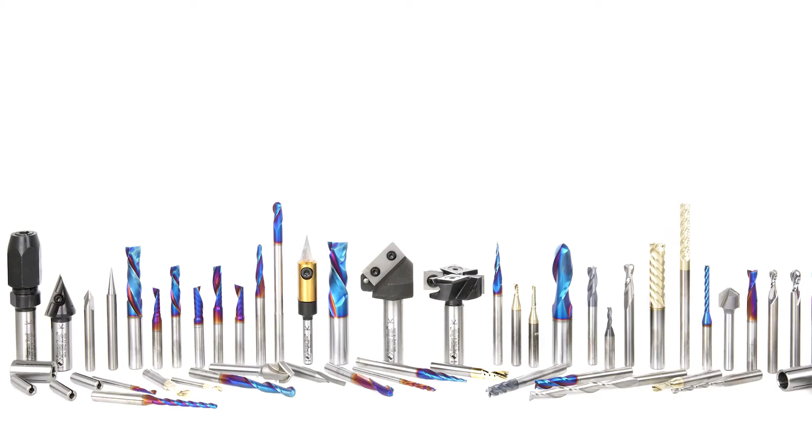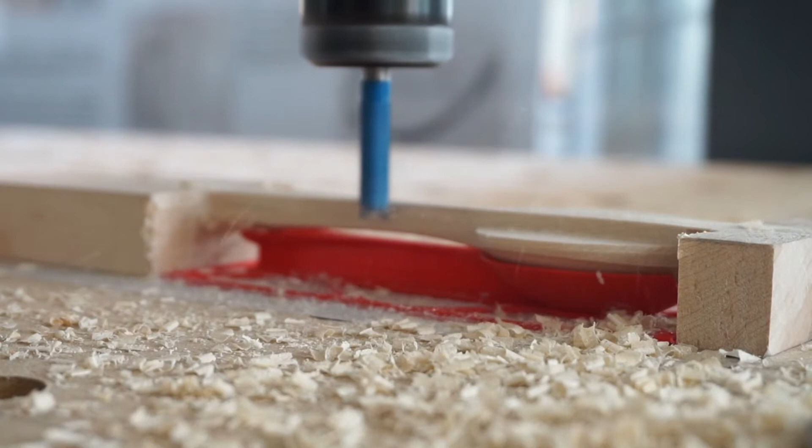The first thing to know when choosing your cutter is what type of cutter it is. There are three main different types, and they differ in the way they remove cut material from the cutting tool. When cutting material, you generally want your cutter spinning at a speed that creates chips rather than dust, as this provides a better surface finish.

When the cutting face interacts with the material, it needs to move the chip out of its path so it can continue unimpeded. The way the cutter is profiled will define how the chips are removed.

Traditional router bits are known as straight cut bits, as their cutting faces are aligned parallel to the cutting axis. They are basic in design and relatively low cost compared to some other designs on the market. Straight cut bits are useful for cutting through solid material which is not fully enclosed, so the chips and dust fall away from the cutting tool, as there is no route to encourage them away from the cutting face.

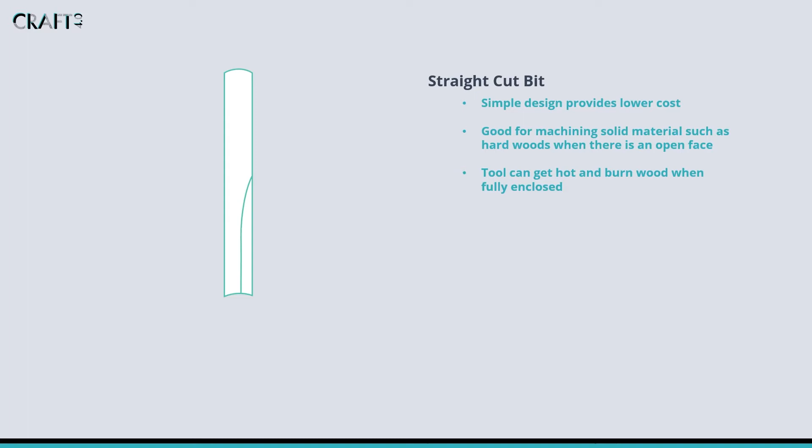An upcut bit is similar in design to a twist drill that most craftspeople are familiar with when boring holes. The upcut bit is profiled so that as the cutting tool rotates, the chips are pulled up and away from the surface of the material.

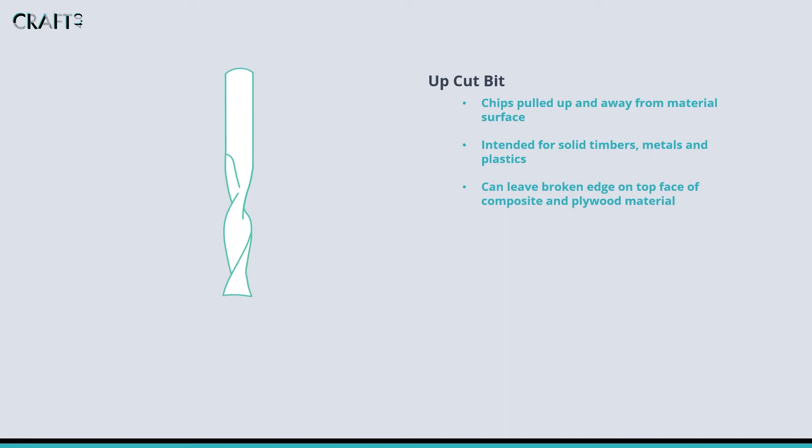They are the most common bits found, and are intended for solid materials and hardwood more so than composites and plywood boards. Upcut bits tend to rip through the material when cutting and can leave a jagged, unseemly edge on the visible face. However, because they remove chips efficiently from the cutting edge, they tend to move through material faster and at a much higher RPM, meaning a job can be completed much quicker.

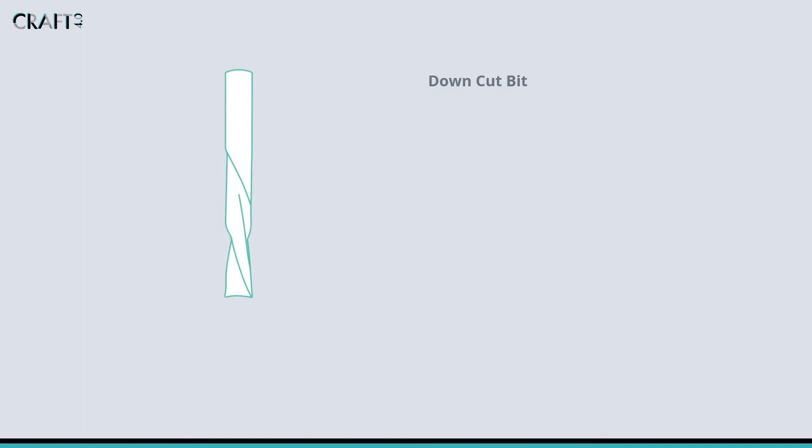Downcut bits are, as the name suggests, designed to work in the opposite way to an upcut bit. Rather than pulling chips up and out of the path of the cutter, they push them down, which can lead to the chips being cut multiple times.

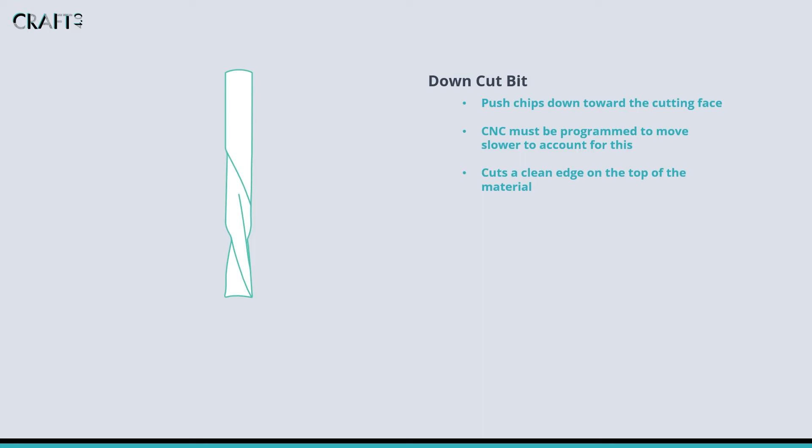For this reason, you must program the CNC to rotate slower and progress through the material at a reduced rate. Downcut bits are, however, the favoured choice for cutting through thin material, such as thin plastic sheets and wood veneers. They are also good at preserving the top face of the material, so if you're working on a piece that requires a clean cut on the upward face, this is the type of cutter to use.

Compression bits utilise both upcut and downcut profiles in their flute design to provide a combination tool that can be used at higher speed through thicker material, like the upcut bit, but without the potential damage to the top face found on the upcut bit.

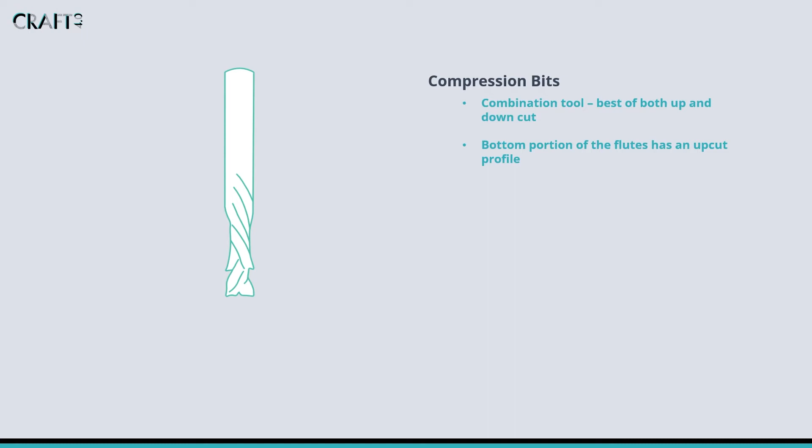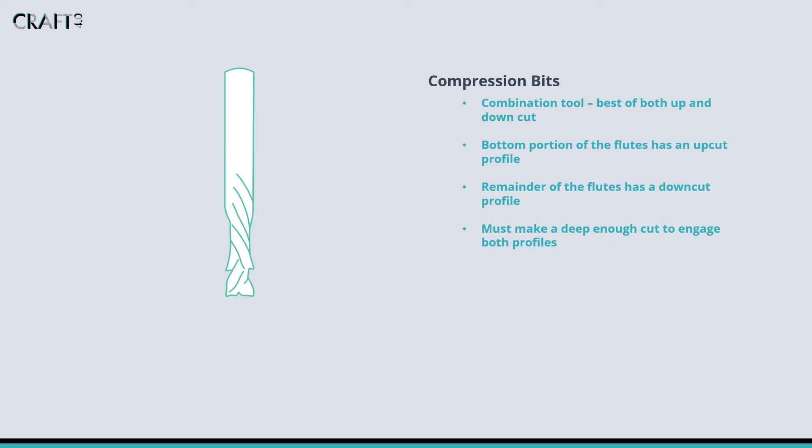They're particularly useful when cutting through plywood materials, which are susceptible to splintering on either the top or bottom face when cutting through the full thickness of the material. To gain full benefit from the two different profiles, the compression bit must engage enough of the tool to utilise both the upcut and downcut of the profile.

Cutting tools are made up of several sections that allow them to be used correctly. To properly plan and program your CNC, you will need to understand the different sections of the cutting tool and how they relate to programming the machine.

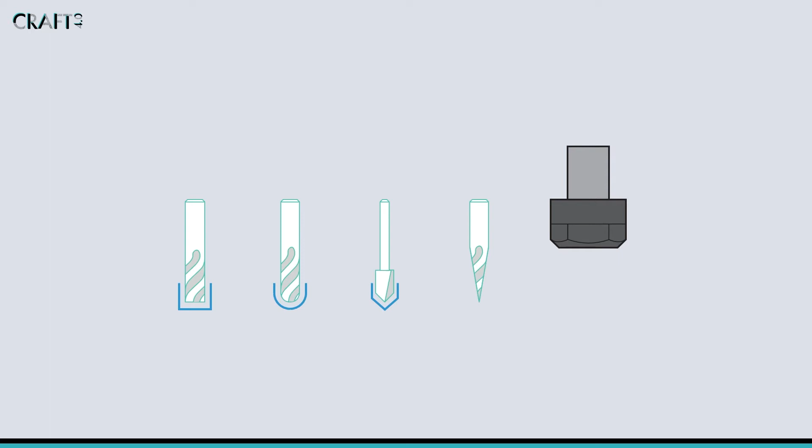The first way cutters are identified is through the profile of their cutting faces. There are many different types of cutter shapes and specialised cutters that can be bought or made to provide a specific profile to the machining. For now, we're just going to focus on the basic and most common profile shapes.

End mills are flat-bottomed cutters and provide a profile that allows for a smooth and even finish on faces perpendicular to the cutting axis. They are often used for machining profiles as well as for cutting pockets in the material, which will have a flat bottom. When machining in 3 dimensions, an end mill is often used to quickly remove lots of material roughly before a cutter of a different shape is used to finish the part.

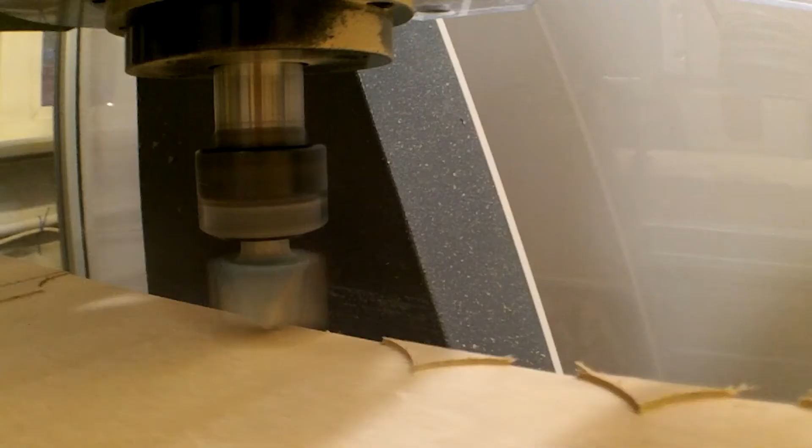A variation of the end mill, the bottom cleaning cutter, is very similar to that of an end mill, but is often used for planing faces, as its large diameter relative to a standard end mill allows for the surface to be cut cleaner with fewer tool marks.

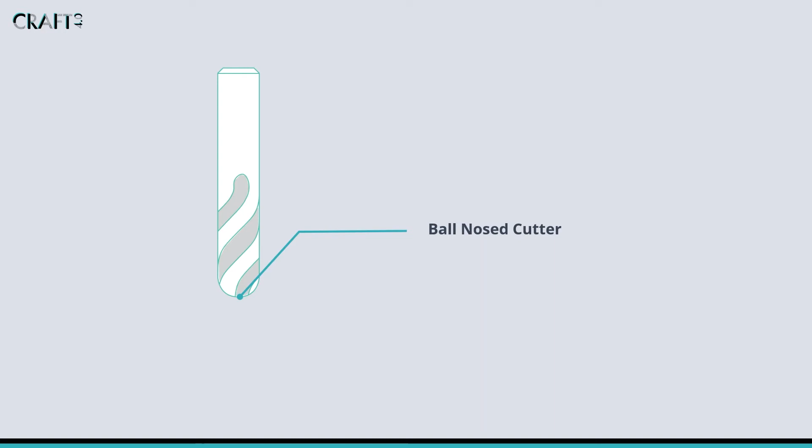Bits with a rounded end are often referred to as ball-nosed, ball-head, or cove cutters, and are cutting bits with a fully radiused end. These mills are used for providing internal radii between the flat and perpendicular edges inside a pocket, and can be used for finishing where there are lots of ridges and troughs.

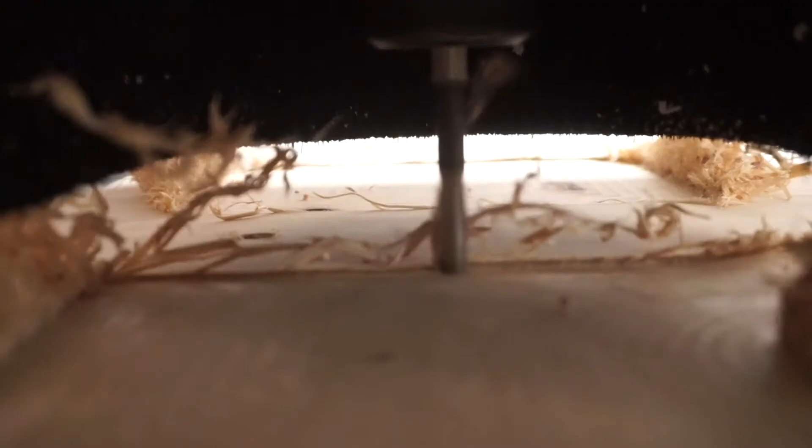End mills with only a small radius rather than a full one are known as bull-nosed end mills, and can act as an intermediary between a flat end mill and a ball-nosed cutter. They are useful if you want to create an internal radius without changing to a second tool.

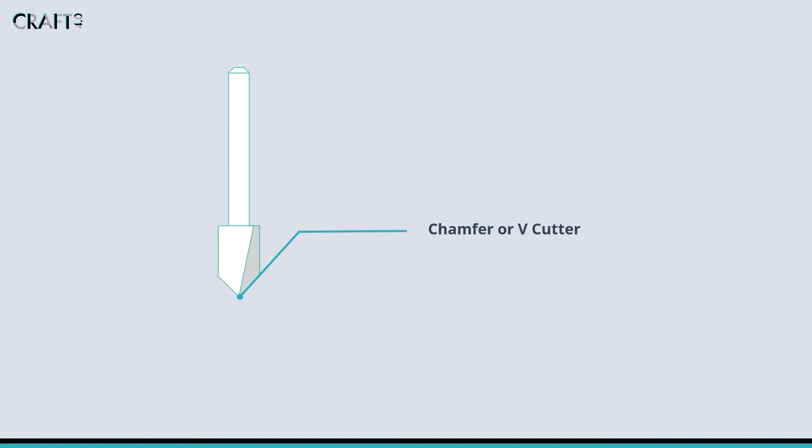There are various types of tapered bit that can be used when machining and are useful for doing different jobs. Standard 45-degree bits are useful for machining a smooth and even chamfer to an edge, or for engraving text and details to achieve a traditional carved look to a workpiece. Fully tapered mills are also available for machining fine detail in a piece of material.

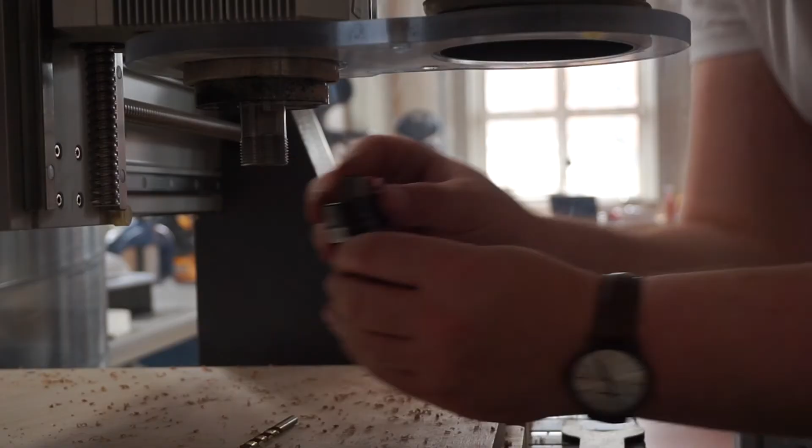Cutting tools are simple objects but have several features that need to be understood to use them appropriately. When understanding and categorizing your cutters, you will need to know two bits of information other than the cutter profile, which we described earlier.

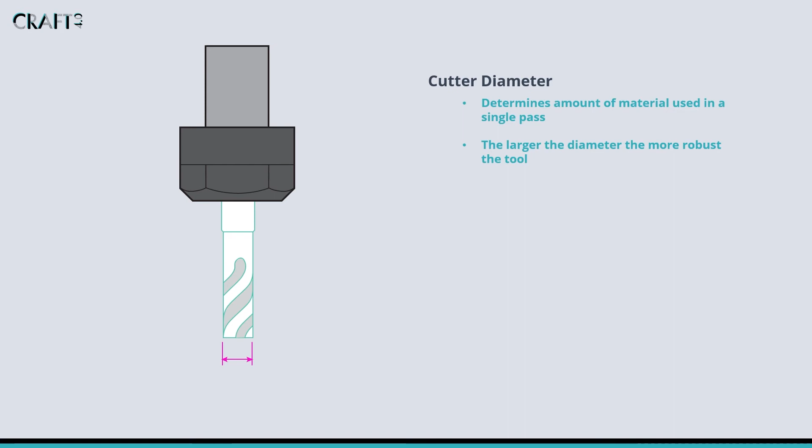The first is the diameter of the cutting face. This dimension is important for understanding how much material is to be removed in a single pass, and whether a tool is the correct diameter to machine a feature, especially internal features like pockets. The more surface area of the tool that is in contact with the material, the slower a tool can progress through the material. However, there is also a sweet spot, as the smaller the diameter, the more susceptible the tool is to being damaged.

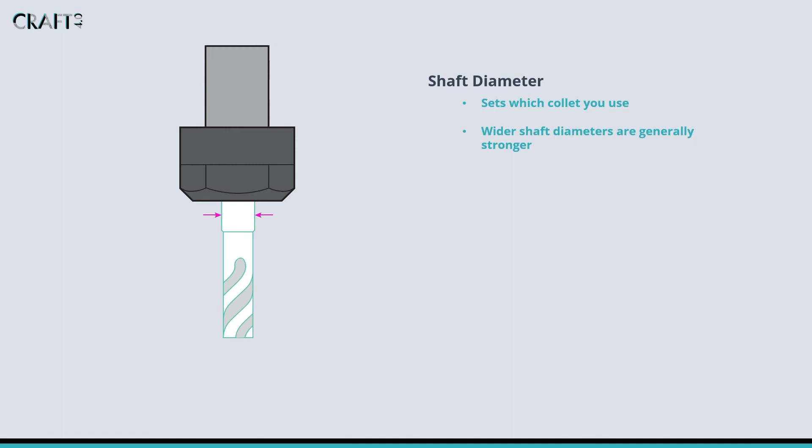The next dimension that tools are often categorized by is the diameter of their shaft or shank. This is the part of the tool which is held by the tool holder. Sometimes a tool has a shaft diameter that matches the width of the tool, but often the shaft will be of a different dimension. Again, as with the diameter of the cutting face, the larger the shank diameter, the stronger the tool, and as such you are likely able to be more aggressive with your cutting speed and depth.

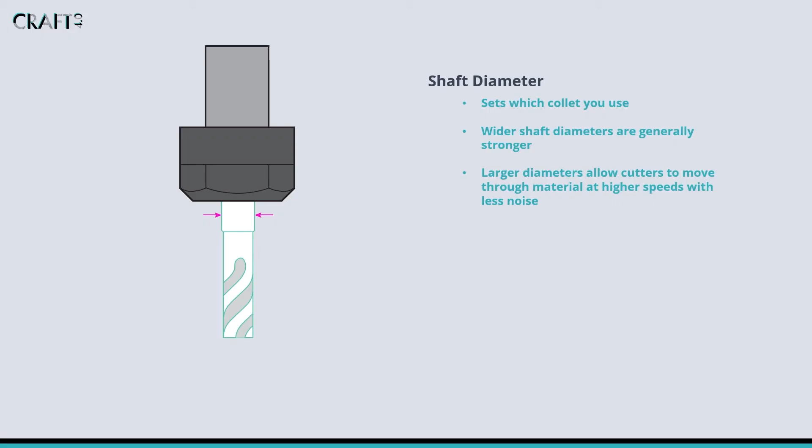Some smaller diameter shafts can cut at higher speeds, but you may find that they are noisier than the larger diameter tool. Understanding the overall length of your tool allows you to program how the tool can work in the Z dimension. Often the overall length is not a critical dimension, but it is important to know how much of the shaft needs to be held within the collet of the tool holder.

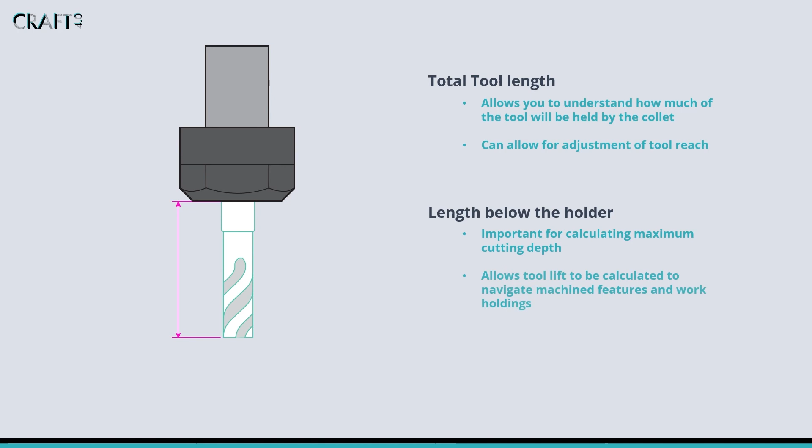Often, a more important dimension is the length of the tool below the holder, as this sets the maximum depth a tool can move in the Z dimension before the end of the tool holder meets the top of the workpiece, or any clamps or work holdings that you may have. This is also important when the tool is moving around the piece, as the machine may need to accommodate for this in its Z travel.

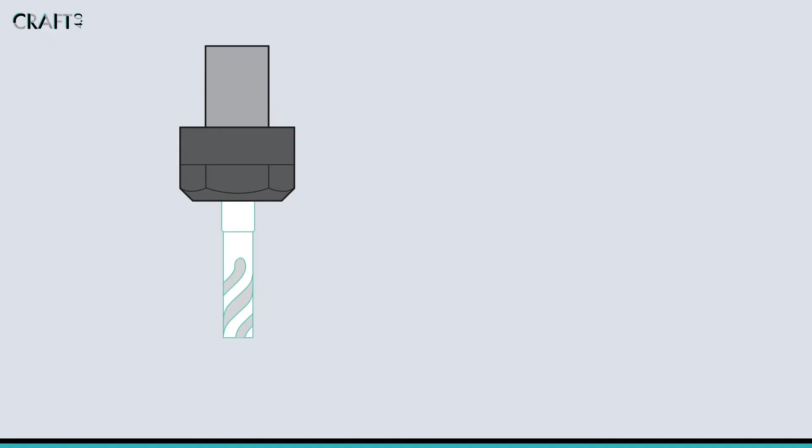If you have a shoulder on your tool, the machine will need to know the length below the shoulder to the end of the tool, so that it will know when it can move within a slot or pocket before the shaft encounters the material.

After this, the length of the flutes is important, as this is the length that sets the maximum permissible cutting depth for the tool. You don't want to plunge the tool past this length, as you will end up with material that is not being cut correctly, and this could damage your machine.